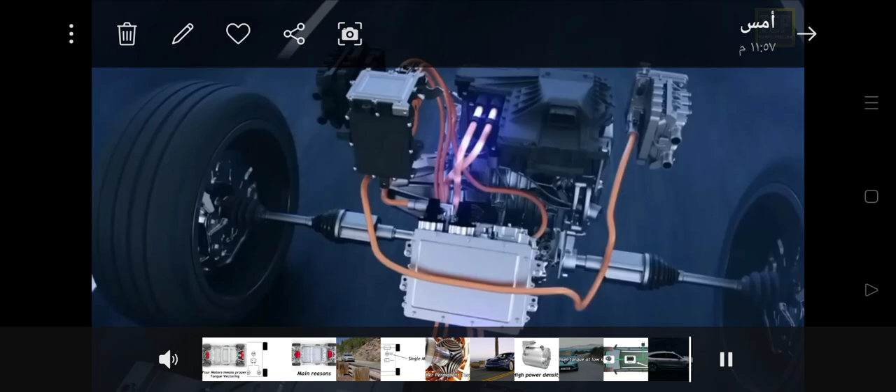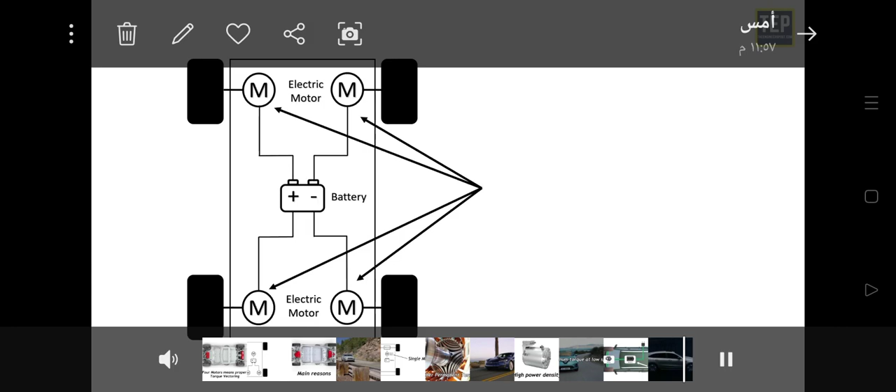Electric cars are available in different drivetrain options. The placement of the electric motor plays a very important role in the power delivery and purpose of the vehicle. EVs can come in different configurations, such as a single motor, dual motor, 3-motor, or a separate motor for each wheel. Some EVs like Tesla use a single or dual motor setup.

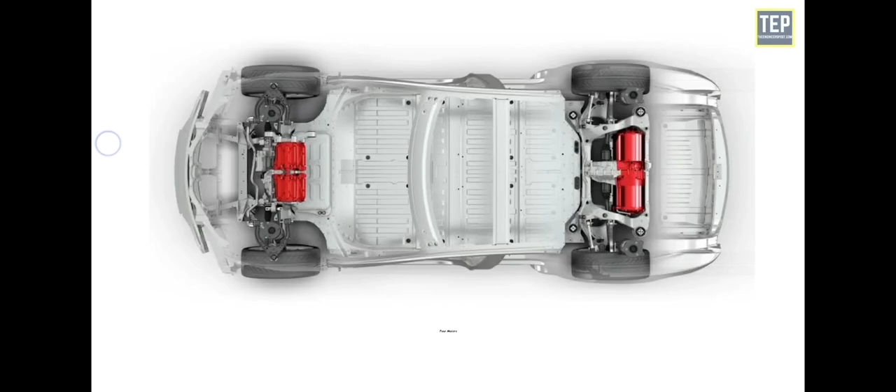The wheels are directly connected to the motors, eliminating transmissions. The Model S Plaid and the Tesla Roadster come with a 3-motor setup: 2 individual motors drive each of the rear wheels, and a common motor drives the front wheels. The Rivian R1T and R1S have separate motors for each wheel, however they are inboard and not hub motors. This setup increases the agility and handling of the vehicle.

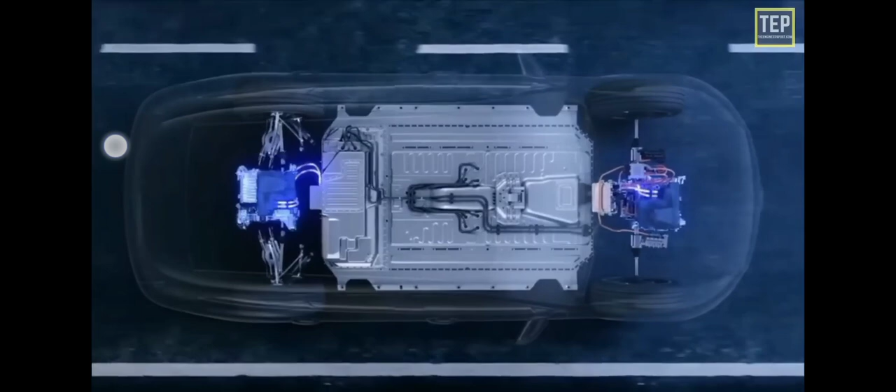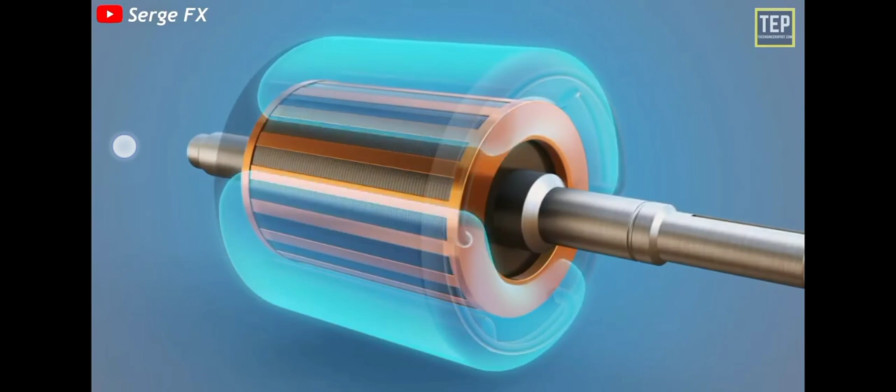Before getting into these motor configurations in detail, let's understand how an electric motor works inside an electric car. An electric car motor works using a physical process that consists of using a current to create a magnetic field at the fixed part of the machine, called the stator, whose displacement sets in motion a rotating part, called the rotor. Understanding how an electric motor works is pretty simple.

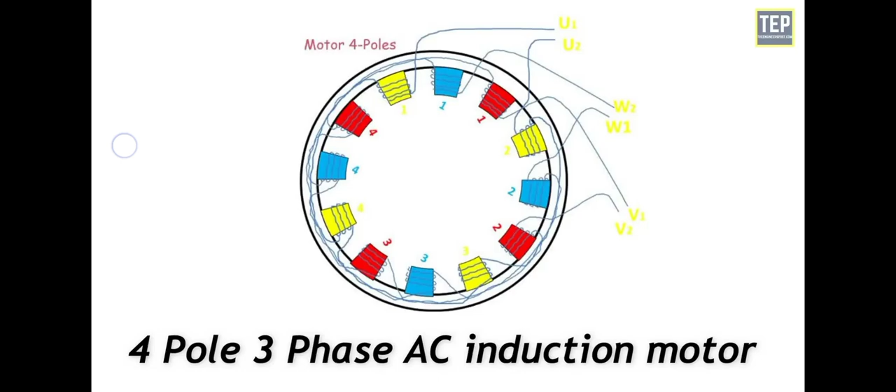Here's the simplified explanation of how a 4-pole, 3-phase AC induction motor works in a car. It starts with the battery in the car that is connected to the motor. Electrical energy is supplied to the stator by the car's battery. The coils within the stator, made from conducting wire, are arranged on opposite sides of the stator core and act as magnets in a way.

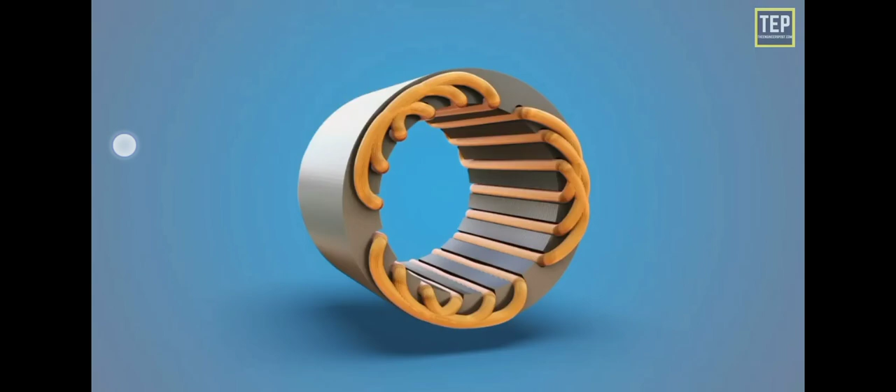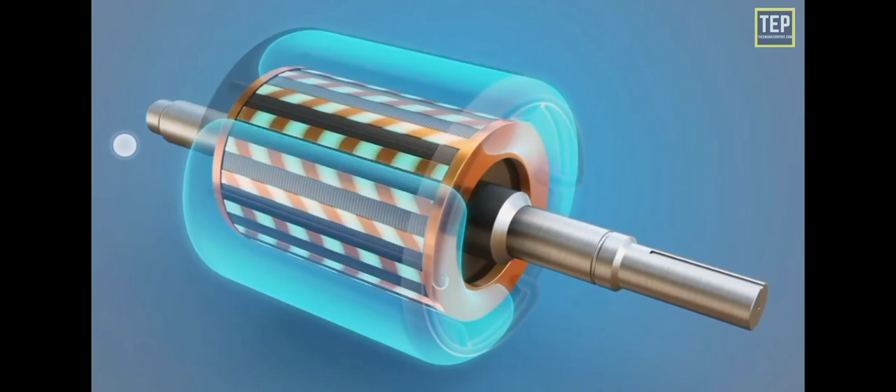When the electrical energy from the car battery is supplied to the motor, the coils create rotating magnetic fields that pull the conducting rods on the outside of the rotor along behind it. The spinning rotor is what creates the mechanical energy needed to turn the gears of the car, which in turn rotate the tires. Well, that's about the working part.

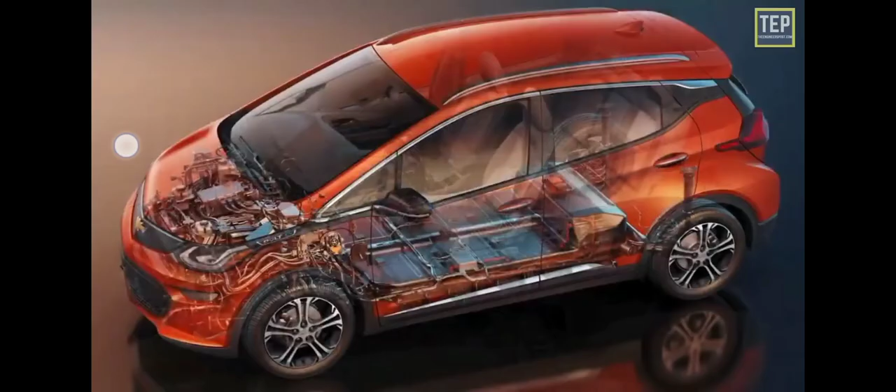Now about the motors. There are different types of electric motors used in the automobile industry. When it comes to electric vehicles, there are 7 types of motors, each with its own strengths and weaknesses. They are: brushed DC motor, brushless DC motor, permanent magnet synchronous motor, induction motors, switched reluctance motors, synchronous reluctance motor, and axial flux ironless permanent magnet motor.

Now let's see how these motors are different from one another, starting with the brushed DC motor. Brushed DC motor is one of the simplest types of DC motor. It uses brushes to transmit current to the motor winding through mechanical commutation. The armature or rotor is an electromagnet, the field magnet is a permanent magnet.

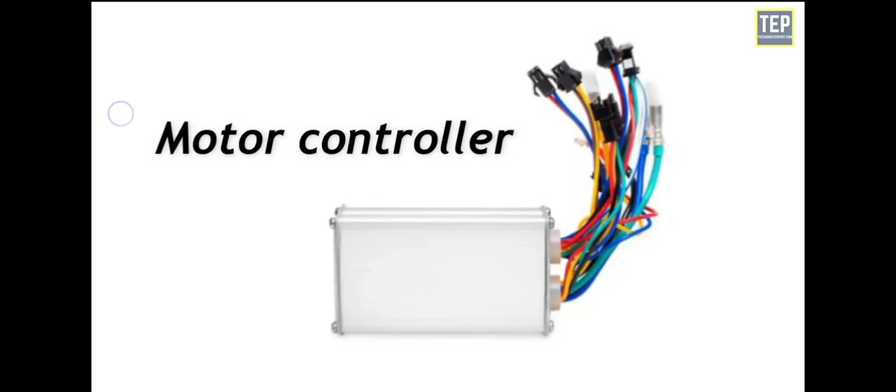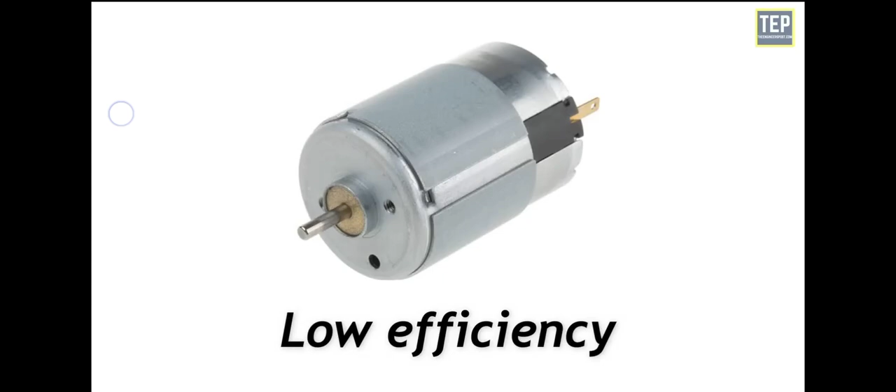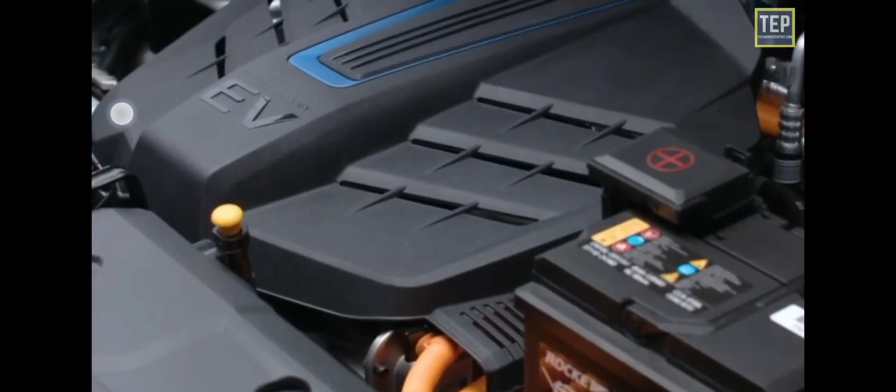This motor does not require any controller to operate or vary the speed. The advantage of these motors is the ability to provide maximum torque at low speeds. On the other hand, the disadvantages are its bulky structure, low efficiency, heat generated by the brush, and the associated drop in efficiency. The heat is also difficult to remove as it is generated in the center of the rotor. Because of these reasons, brushed DC motors are not used in EVs anymore. Cars like Fiat Panda Elettra used a series DC motor.

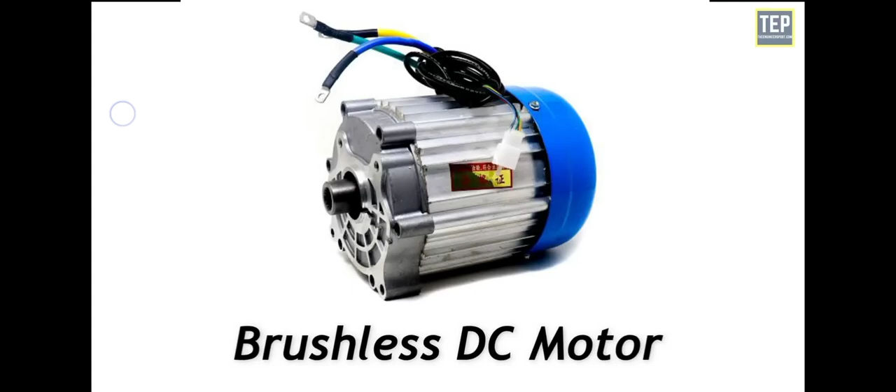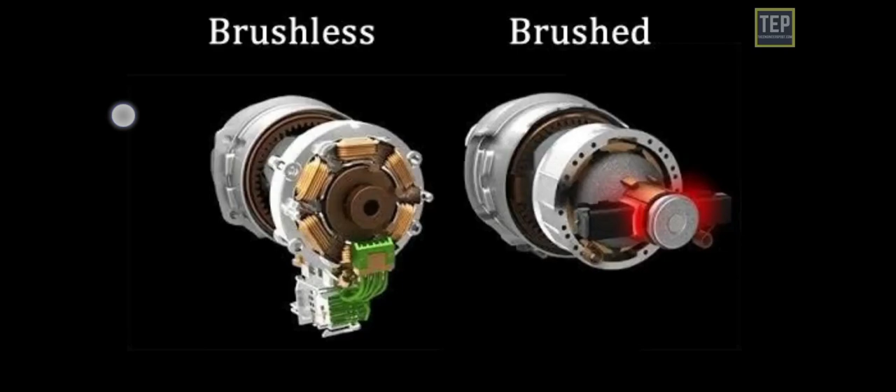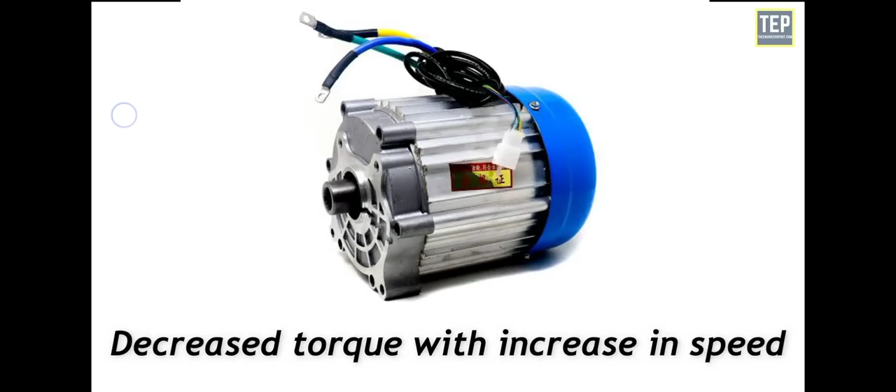It is a DC motor with permanent magnets. It is called brushless because it does not have a commutator and brush arrangement. The commutation is done electronically in this motor, and these motors are maintenance-free. They have traction characteristics like high starting torque, high efficiency around 95 to 98%, and are suitable for the high power density design approach. Brushless motors are the most preferred motors for electric vehicle application due to their traction characteristics. These are useful for use in small cars requiring a maximum of 60 kilowatts of power. The disadvantages are a short constant power range, decreased torque with an increase in speed, and high cost because of the permanent magnet. Cars like Toyota Prius used a brushless DC motor.

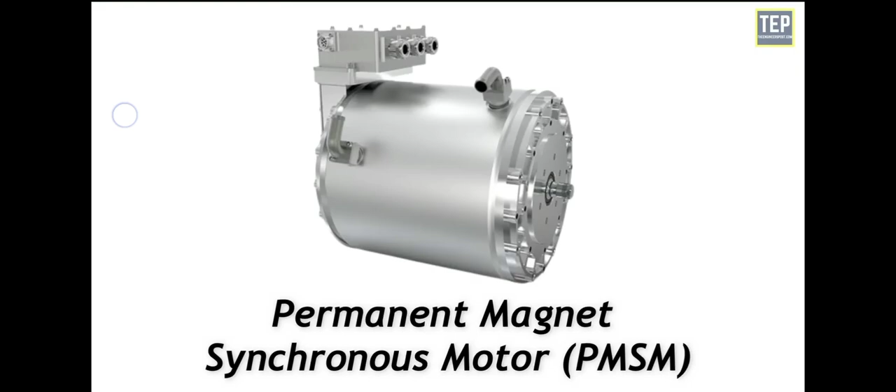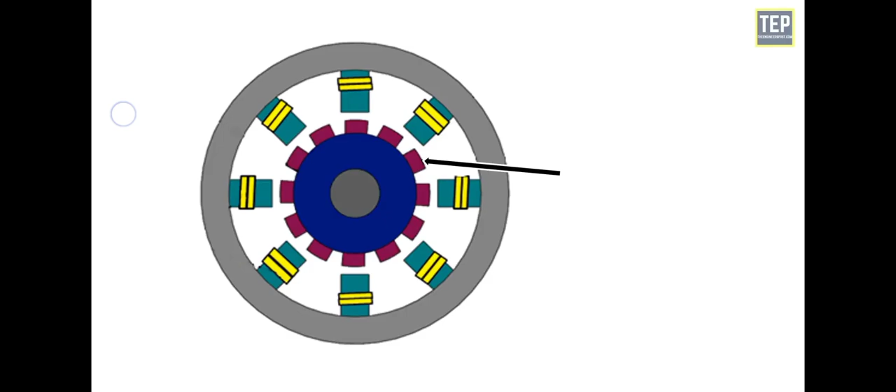In this motor, there are permanent magnets on the rotor. Like brushless DC motors, these motors also have traction characteristics such as high power density and high efficiency. Permanent magnet synchronous motors are available for higher power ratings. It is also expensive as compared to other motors. The advantage of this motor is that it can operate in different speed ranges without using a gear system. It is efficient, compact, and suitable for in-wheel applications. It also has high torque even at very low speeds. The disadvantage is that there is a huge iron loss at high speeds during in-wheel operation.

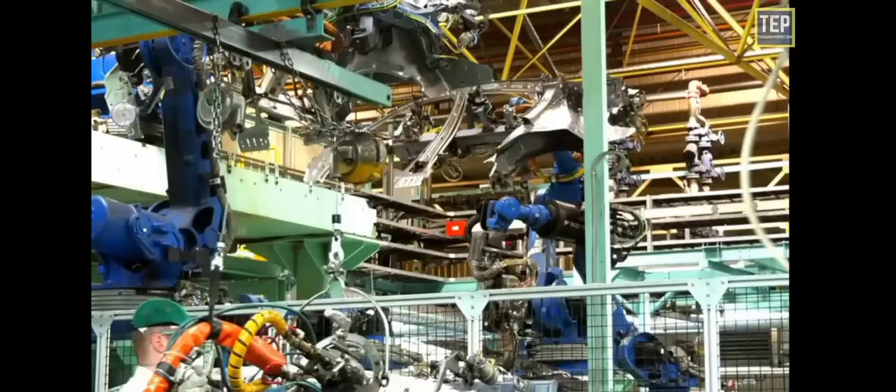Most automotive manufacturers use these motors for their hybrid and electric vehicles. For example, Chevrolet Bolt EV, Ford Focus Electric, Nissan Leaf, and BMW i3 use permanent magnet synchronous motors for propulsion.

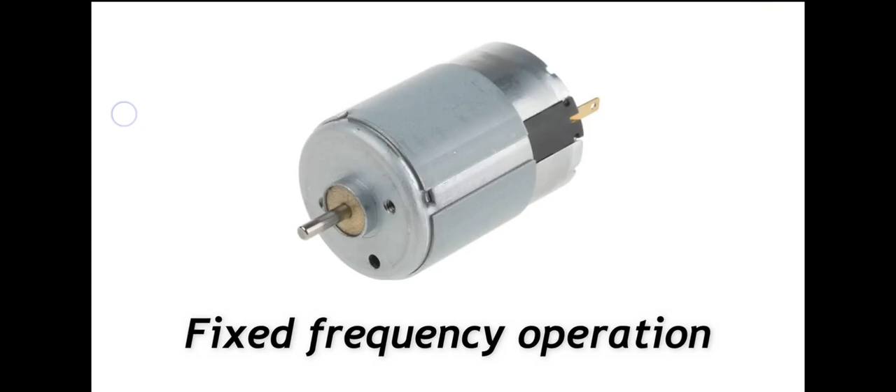Induction motors do not have a high starting torque like DC series motors under fixed voltage and fixed frequency operation. But this characteristic can be altered by using various control techniques like vector control or field-oriented control methods. By using these control methods, the maximum torque is made available at the starting of the motor, which is suitable for traction application. Squirrel cage induction motors have a long life due to less maintenance.

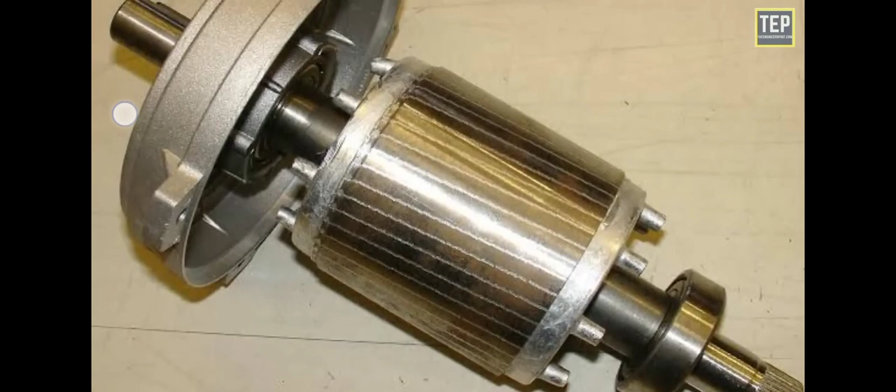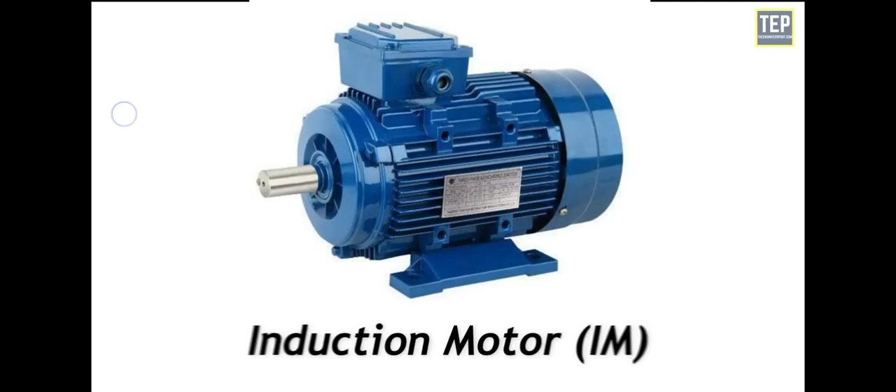These motors can be designed up to an efficiency of 92 to 95%. The drawback is that it requires a complex inverter circuit and control of the motor is difficult. Induction motors are the preferred choice for performance-oriented electric vehicles due to their cheap cost. Tesla Model S is the best example to prove the high-performance capability of induction motors. Toyota RAV4 and GM EV1 also used this motor.

Switched reluctance motor is a category of variable reluctance motor with double saliency. Simple and strong in construction, the rotor of this motor is a single piece of laminated steel with no windings or permanent magnets on it. This reduces the inertia of the rotor, which helps in higher accelerations. The robust nature of this motor makes it suitable for high-speed applications.

It also provides high power density, which are some essential features of electric vehicles. The biggest drawback of switched reluctance motor is complexity in control and increase in switching circuit. It also has some noise issues.

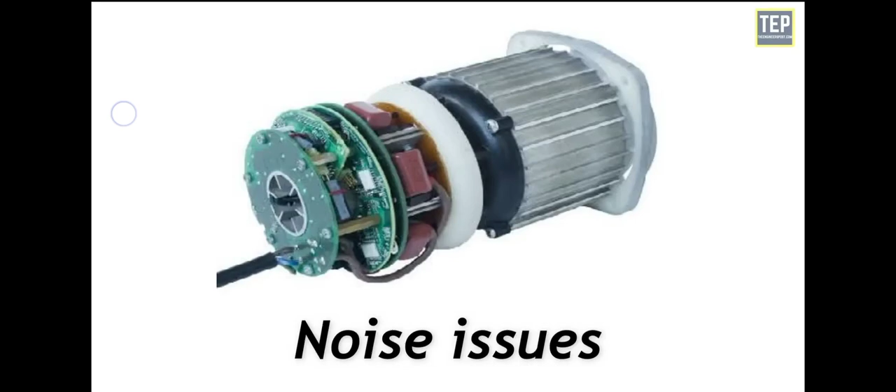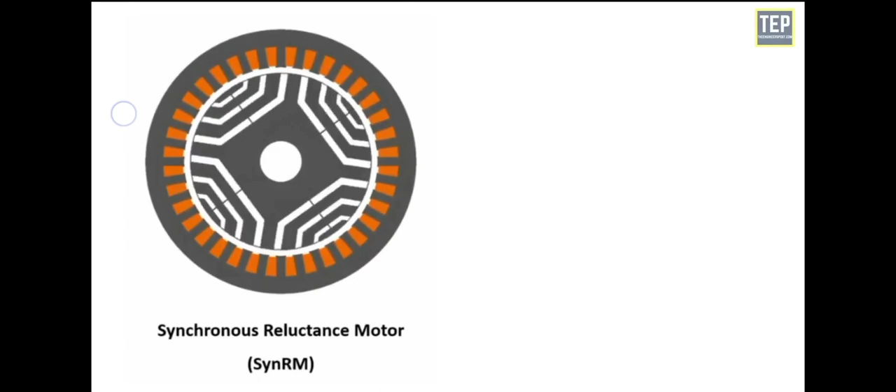Synchronous reluctance motor is a synchronous electric motor, the torque of which is due to the inequality of magnetic conductivities by quadrature and direct axis of the rotor, which has no field windings or permanent magnets. Currently, this type of motor is becoming very popular as an alternative to electric as well as hybrid vehicles, due to its easy and strong construction.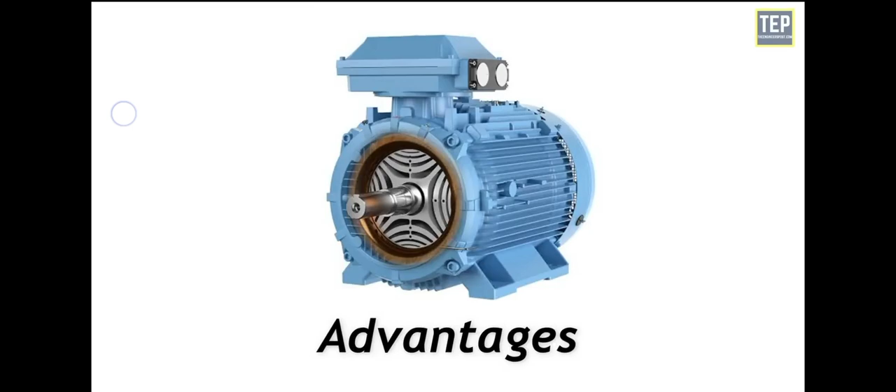The main advantage of this motor mainly depends on the non-existence of rotor cage losses, by allowing a higher permanent torque than the torque of an induction motor of the same size.

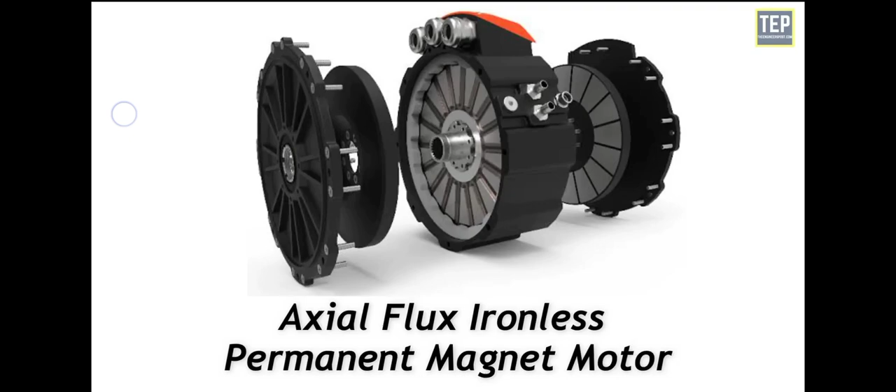This motor is the most advanced motor used in EVs. It has an external rotor with no slots. The use of iron is avoided here. The stator core is also absent to reduce the weight of the machine. The air gap here is axial field type, providing better power density.

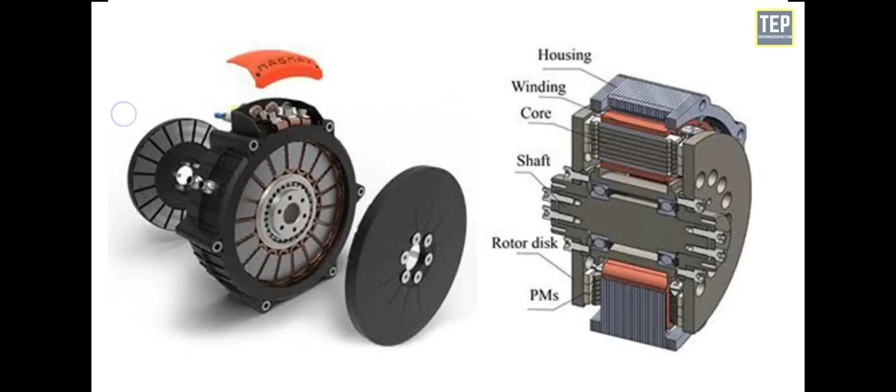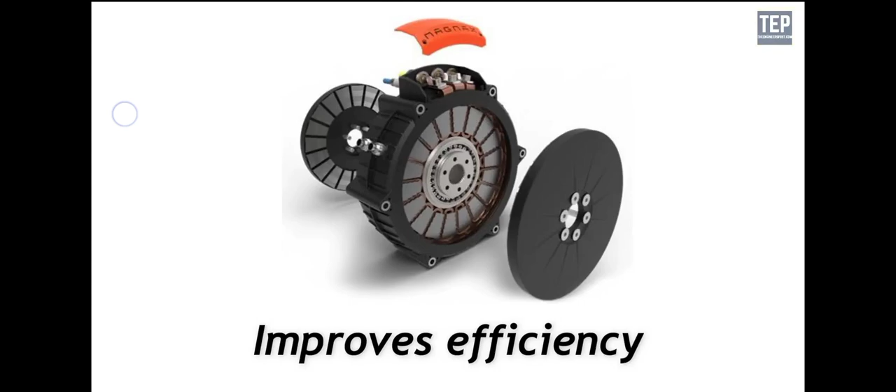A notable advantage of this machine is that the rotors can be mounted on the lateral sides of the wheels, placing the stator winding on the axle. The slotless design improves efficiency by reducing copper losses, as more space is available. Renovo Coupe used this motor.

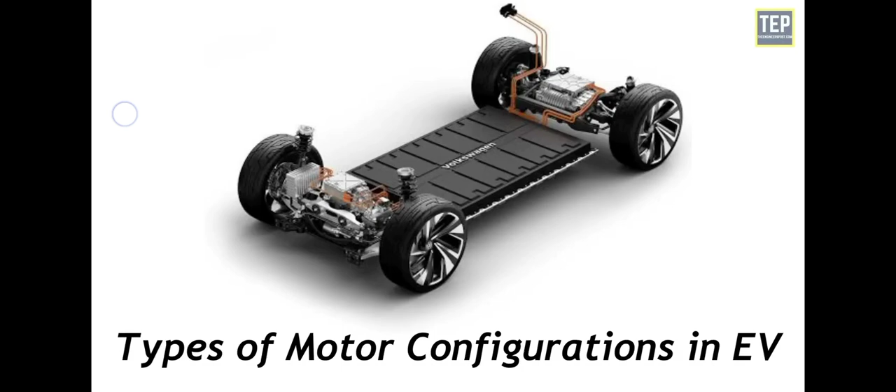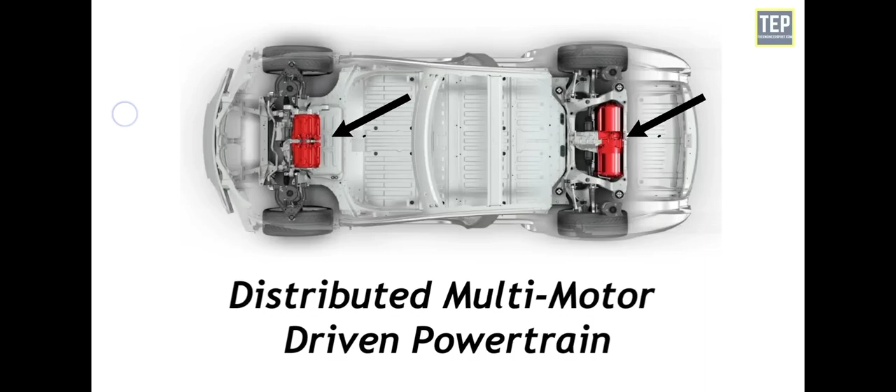According to the number of motors used in a vehicle and their configuration, existing powertrain EVs can be classified into two types: the centralized single-motor driven powertrain and the distributed multi-motor driven powertrain. The centralized single-motor one-speed driven powertrain is the most common structure in modern EVs. Some EVs are focused on distributed multi-motor driven powertrain, which is mainly classified into three categories: dual-motor powertrain, triple-motor powertrain, and four-motor powertrain. Let's start with the single-motor configuration.

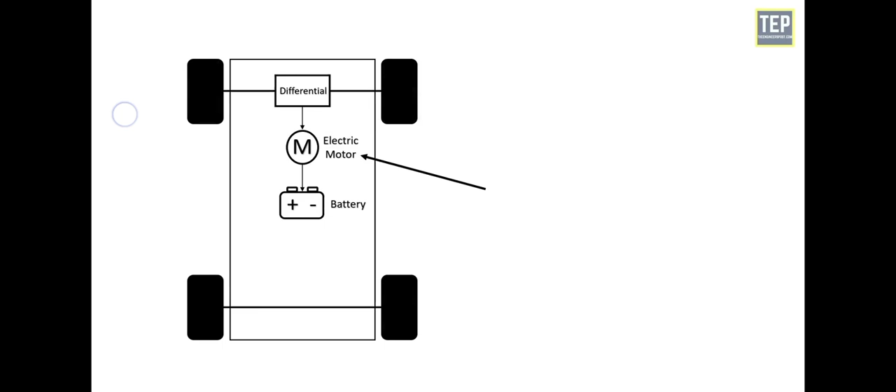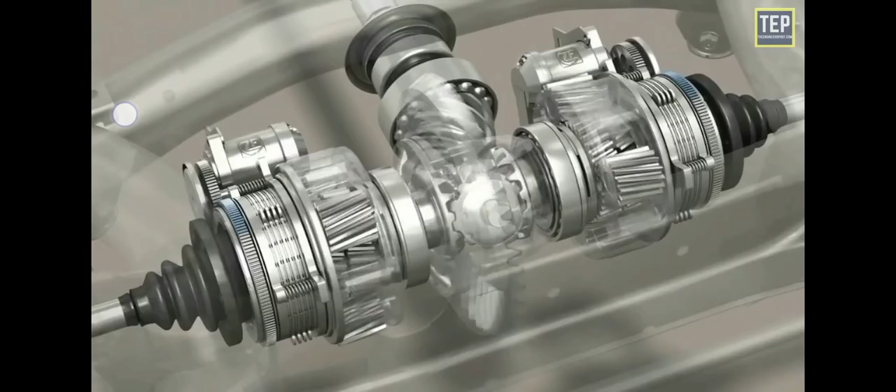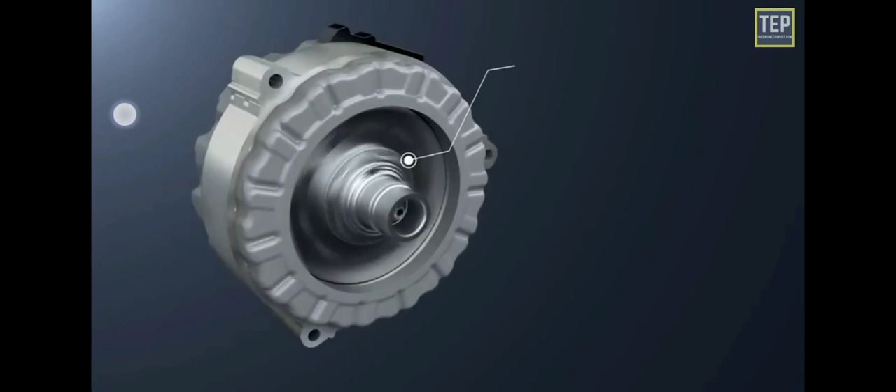It's relatively simple to understand the single-motor system. There is a single motor that drives the car, which is charged and produces torque to the engine. In the single-motor configuration, the electric motor is mounted as front-wheel drive. There is also a differential that allows the wheels to rotate at different speeds. The motor converts the electrical energy received from the battery into mechanical energy, which enables the vehicle to move. It also acts as a generator during the regenerative process, which sends energy back to the energy source.

Some Tesla EVs and the Polestar 2 come with a single-motor front-wheel drive, and there is also a dual-motor all-wheel drive version. The electric range of this car is 425 kilometers, with a top speed of 160 kilometers per hour.

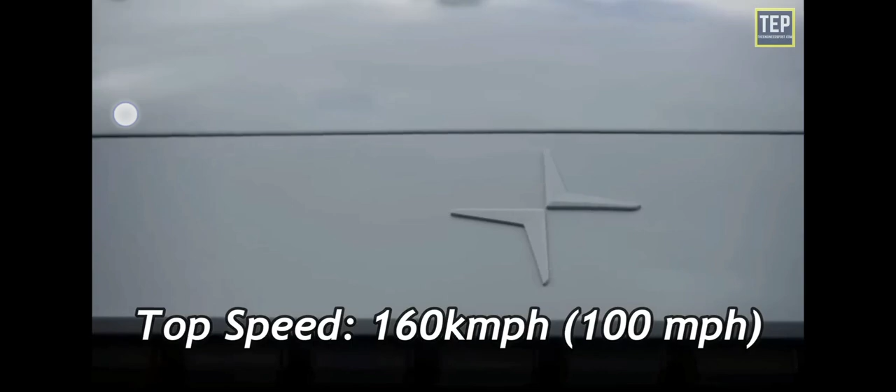Fewer components are needed to create a single motor system, and an adapted conventional transmission is used, which makes it all in all cheaper to build. This makes it a less expensive option for consumers, which is always a good selling point for the eager buyer. It's also a better option for those who are new to the electric car, as it has a slightly different feel than a regular gas-powered car.

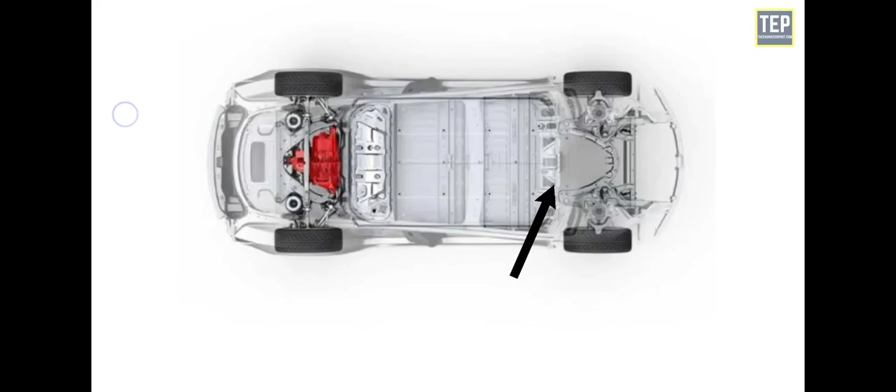It might not be as efficient as a dual motor system, simply because it lacks the second motor to create power. Braking won't feel as normal as a driver is used to, while the transmission is downshifting. To put it simply, the single motor system provides enough power to suit most individuals.

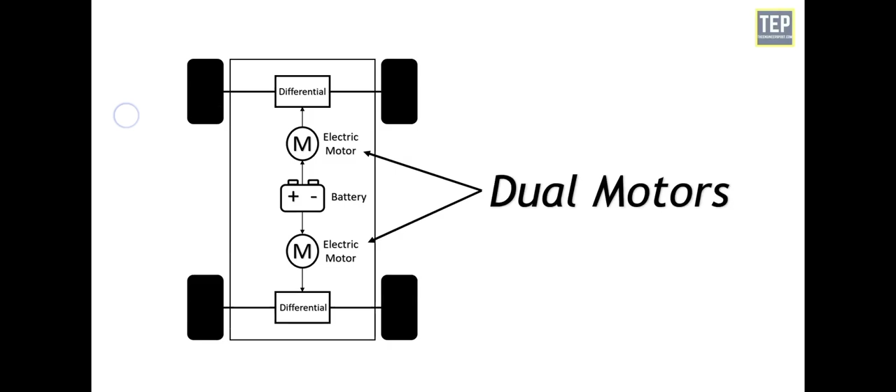When it comes to a dual motor system, you can expect to have a pair of motors placed in different spots of the vehicle. It's relatively clear that a car with two motors should be able to offer more horsepower behind the wheel. The combination of torque from both motors ensures a significant boost in acceleration for the driver. It is important to note that the same is not true for a single-motor electric car.

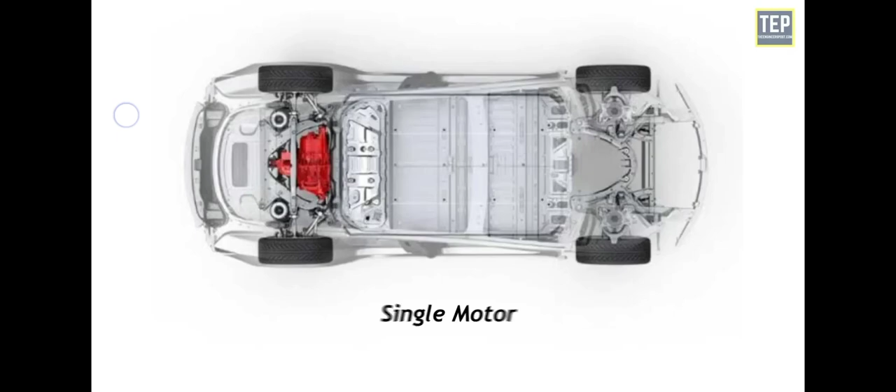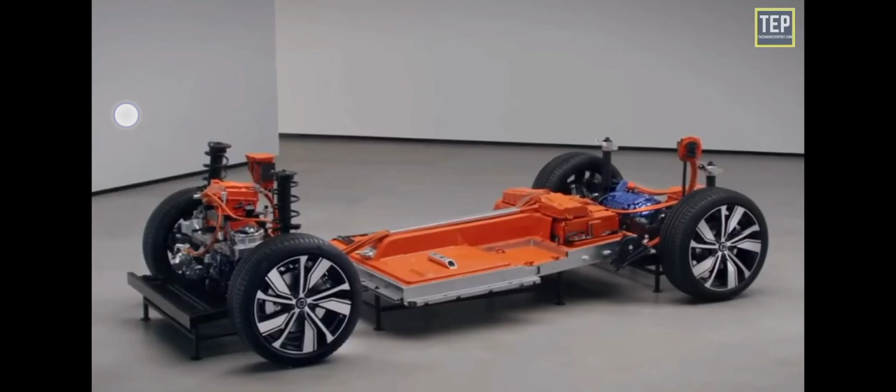However, a dual motor is going to outperform a single motor in terms of efficiency and speed at a higher altitude. With the AWD system and the dual motor, the car is able to distribute the horsepower and maximize the torque levels in immediate response to the road conditions.

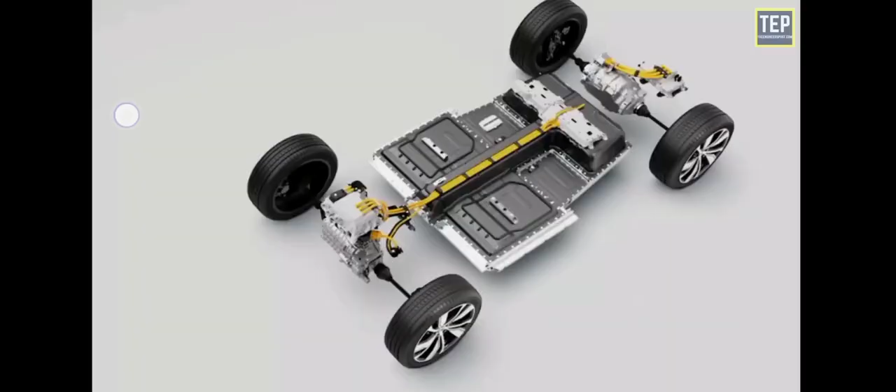In this system, two motors are provided, one on each axle, coupled through a planetary gear, and torque is coupled through a shaft fixed gear. Front and rear motor drives are supplied by one or sometimes two different battery packs. By using this two-motor, two-axle configuration, it is possible to choose different power and torque sizing for the drives, and also to adopt different gear ratios for the gearboxes.

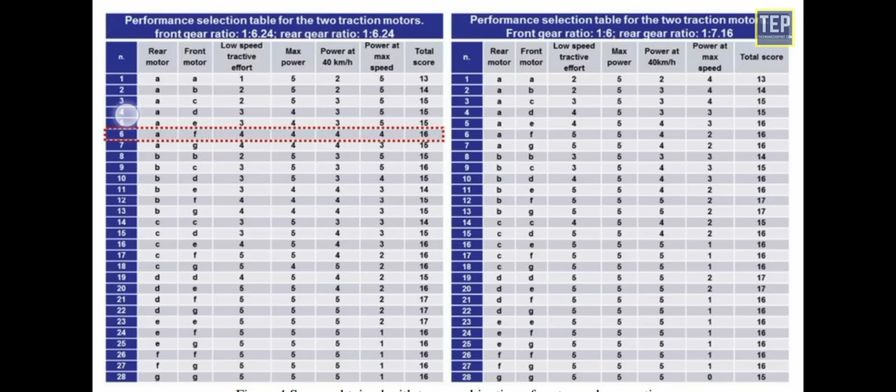You can check out this performance table for the two traction motors for front and rear gear ratios. The use of two traction drives improves the total tractive effort delivery across the whole speed range compared to a single drive of the same total power rating.

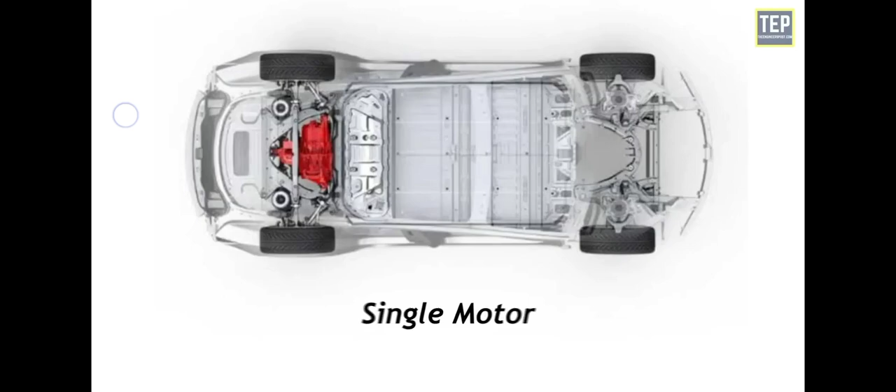The main reasons for having more than one traction motor are the additional degree of freedom in vehicle torque vectoring for enhancing traction and stability control, and the increased reliability of the overall traction system.

Tesla Model 3 comes with the option of a dual motor all-wheel drive system. It has two independent motors for improved redundancy, each with only one moving part for minimal maintenance and maximum durability. Unlike traditional all-wheel drive systems, they digitally control torque to the front and rear wheels for far better handling and traction control. The electric range of this car is 576 kilometers, with a top speed of 260 kilometers per hour.

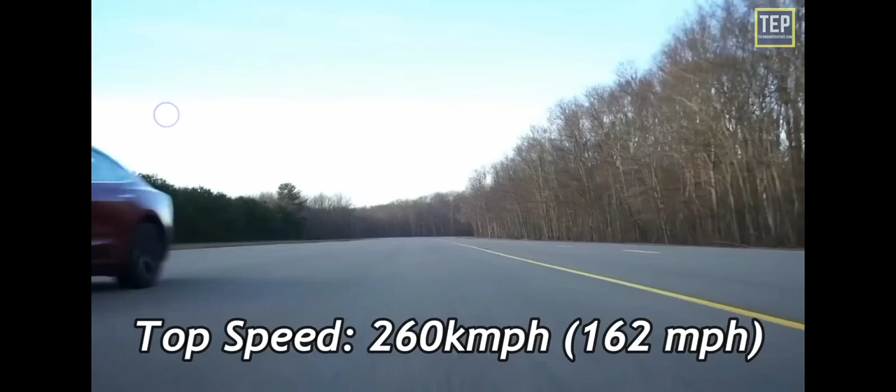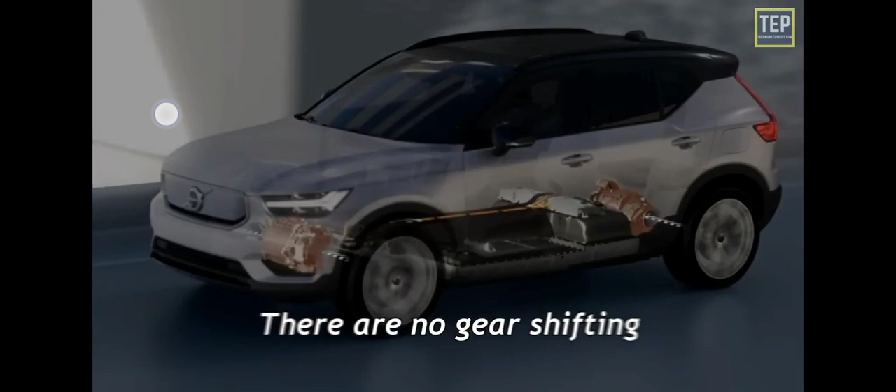The dual motor system allows the car to speed up more quickly than ever before, while also having the ability to stop quickly. There is little to no gear shifting feel to the driver, leaving you with a smooth drive. One of the motors can be used to power the car, while the other set of batteries can be recharging, giving the user the ability to travel further without worrying about charging up.

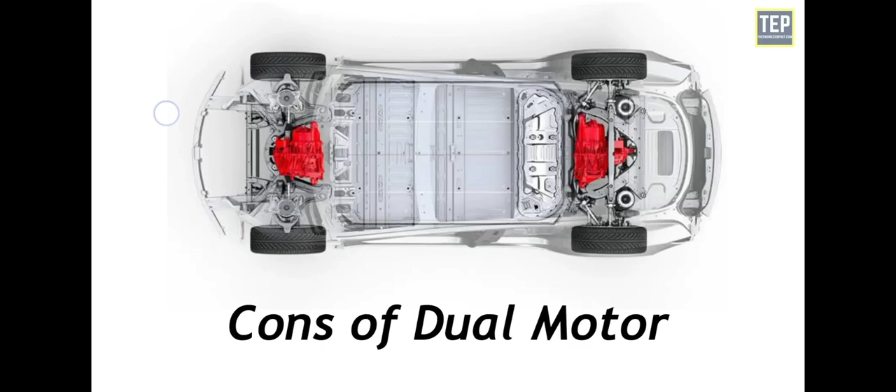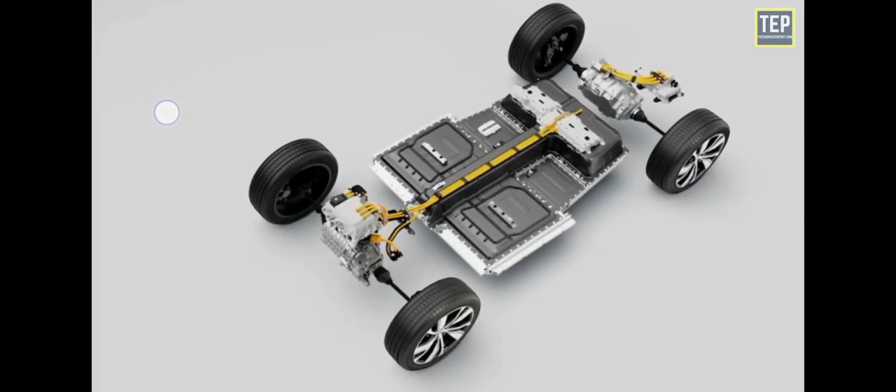Dual motor systems are going to be more expensive, due to the simple fact that they are more complicated to put together, and there is a lack of standard transmission. The overall control software is also going to be slightly more complex than a single motor system.

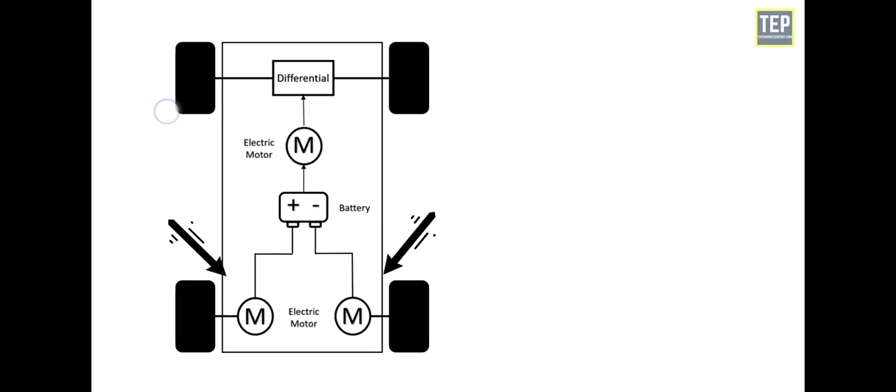In this system, one motor is placed on the front axle, while two motors are fitted to the rear axle, making the car all-wheel drive. The two motors drive each wheel of the rear axle to improve efficiency and are solely responsible for powering the car in normal driving conditions.

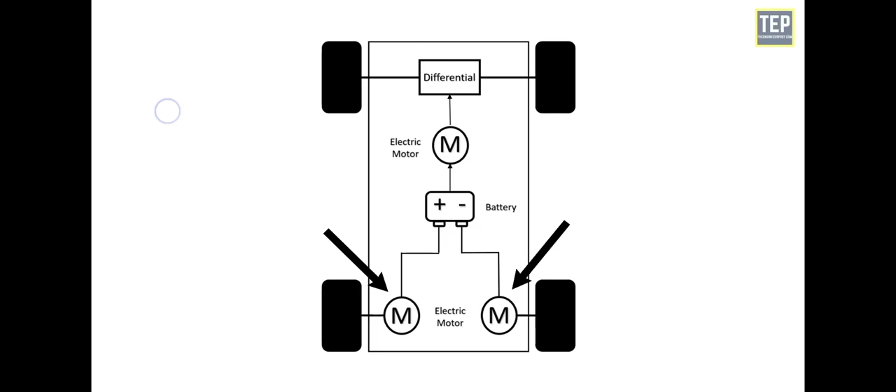The third, front-mounted motor comes to life when the driver needs more performance. Each of the electric motors mounted on the rear axle drives torque directly to the corresponding wheel through a single-speed transmission. That's called electric torque vectoring, and it eliminates the need for a mechanical differential. This exponentially enhances the all-wheel drive system, and the cars have improved handling, stability, and grip.

They stay true to tradition, with the driving feel of the cars being focused on the rear. This powertrain feels sportier than your everyday car and is very eager to drift.

Audi revealed the latest version of the company's first mass-production EV, in the shape of the e-tron S and its Sportback twin. It is the first EV with a three-motor powertrain. The Tesla Model S and Model X also use a three-motor powertrain.

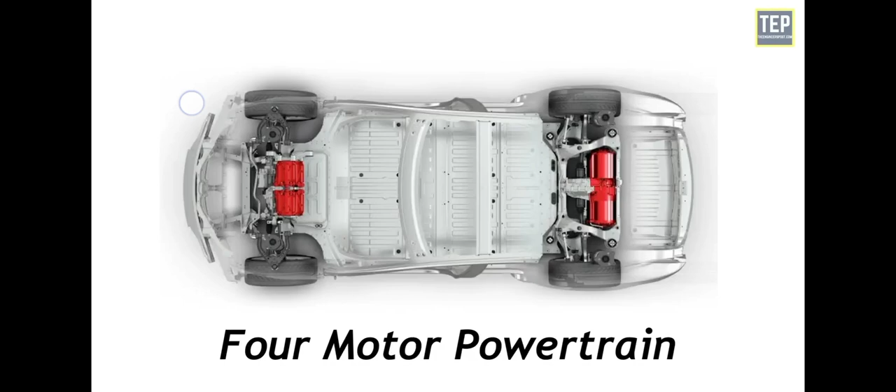With a dedicated motor at each corner, the super-handling all-wheel drive system can precisely apply either positive or negative torque individually to each wheel. This opens the door to torque vectoring and full-time active yaw control, something that will make consumer EVs safer and more energy efficient.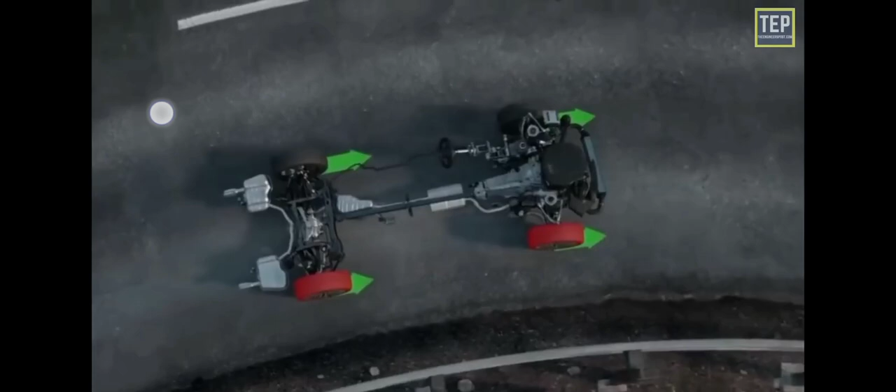Four motors means proper torque vectoring. Usually, as you turn a corner, the inside wheel and the outside wheel rotate at different rates. With torque vectoring, the outside wheel can get more power, pushing the car into a sharper, tighter turn.

An EV with 4 electric motors can also be faster and more responsive, as it adjusts torque electronically by controlling how much power goes to each motor, rather than mechanically.

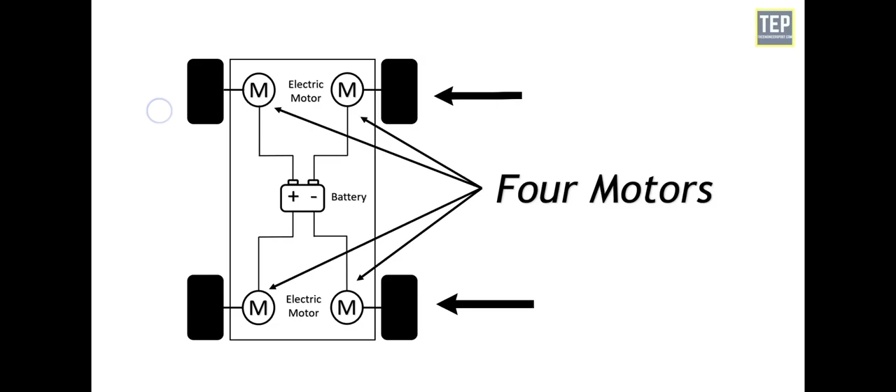Things get even more flexible if you use 2 electric motors for each pair of wheels rather than one. That way, you can use two smaller motors rather than one big one on an axle, and split them out to the sides of the vehicle.

It'll arguably be even more efficient when in-wheel electric motors start to make it to production vehicles. Then the majority of the motor is actually contained within the wheel itself, further pushing the hardware out to the periphery of the car and freeing up even more space in the body for more practical uses.

So what do you think about these powertrain systems, which are best for EVs to provide a better driving experience? What are your thoughts?